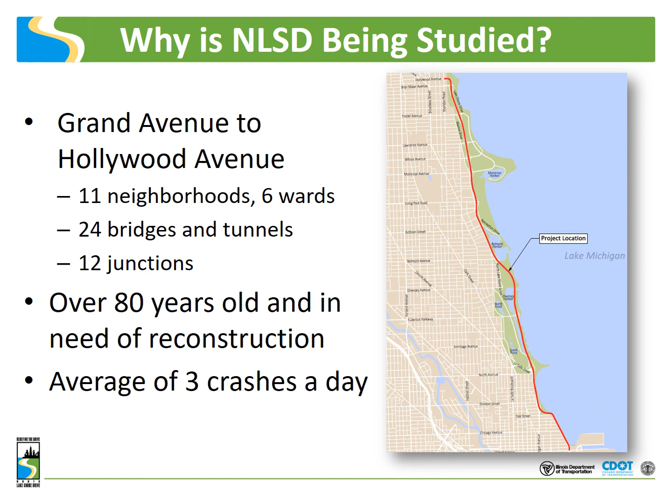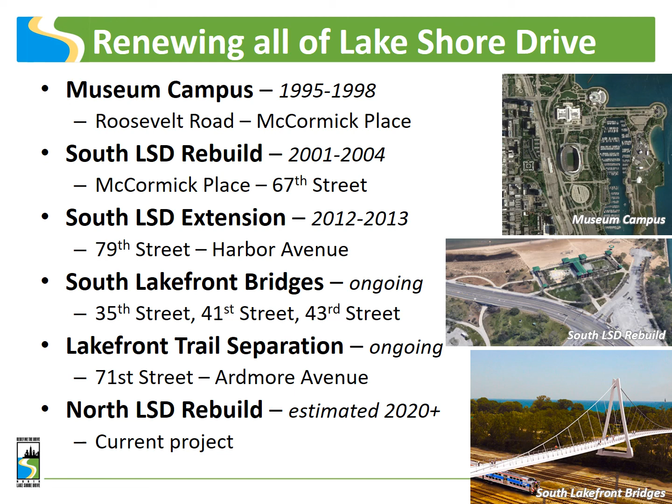This study is part of a larger initiative to upgrade infrastructure and improve safety throughout all of Lake Shore Drive. Multiple projects have been completed on Lake Shore Drive over the past 20 years, including the museum campus, the South LSD rebuild and extension, South Lakefront bridges, and the current Lakefront Trail separation initiative.

The Project Study Group, or PSG, consists of a multidisciplinary team of representatives from the Illinois Department of Transportation, the Chicago Department of Transportation, the Federal Highway Administration, the Chicago Park District, and the Chicago Transit Authority. This group provides technical oversight and expertise in key areas including study processes, agency procedures and standards, and technical approaches.

Some of you may have joined us for the prior 2 public meetings, yet many more of you may be joining us for the first time. We want to highlight the required steps for federally funded projects like this and where we are in this process.

The 3 steps for federally funded projects include Phase 1, where we are currently preparing an Environmental Impact Statement, or EIS, which is the most detailed and rigorous study process. After Phase 1 is complete, Phase 2 engineering would begin. This is detailed engineering, including preparation of design plans or blueprints. Phase 3 is construction. At this time, only Phase 1 is funded.

Over the past few years, we have spent a lot of time capturing your ideas for the corridor, collecting data about existing conditions, considering transportation needs, and developing a range of alternatives. To date, we have received and reviewed over 2,000 public comments.

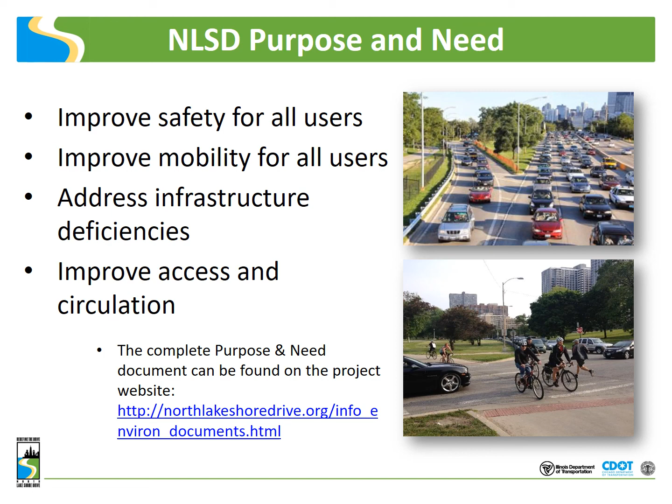After approval of the Purpose and Need Statement in December 2014, the next step was to look at all possible ideas to address the needs of the transportation corridor, keeping environmental considerations in mind. We collected thousands of ideas from the public and even had a few of our own.

Today you will see what we call a range of alternatives, which includes everything from large-scale corridor-wide improvements to a no-action alternative, which only includes performing regular maintenance to the roadway. We have begun the process of whittling down the alternatives, but we are still far from determining a preferred alternative. At each milestone, we reduce the number of options and study those that remain in greater detail.

At one of the meeting stations today, you can see the range of initial alternatives. For these alternatives, a Level 1 screening was performed. We recommend some of the alternatives should be removed based on this screening, since at least one of the following applied: it did not meet the project's purpose and stated objectives, it contained major flaws, it was not financially feasible or reasonable based on significantly greater cost compared to other viable alternatives, or it resulted in severe and unacceptable socioeconomic or environmental impacts.

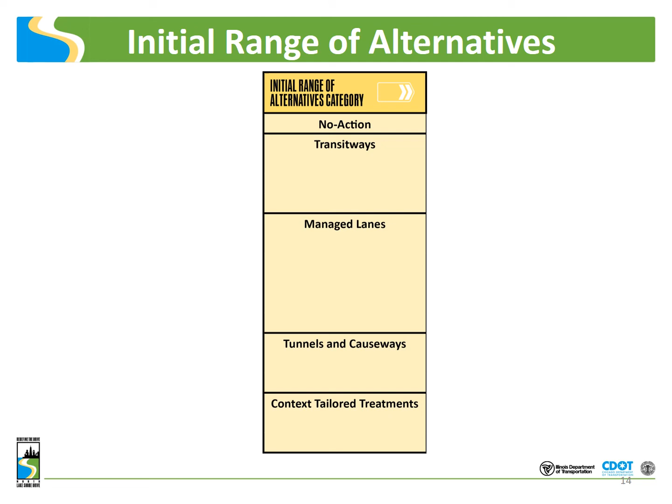The first alternative to be considered is the 2040 no action. No action assumes that routine maintenance is performed on North Lake Shore Drive, but there are no additional trail, transit, or roadway improvements along the drive by the year 2040. When we apply the Level 1 screening criteria to the no action, our analyses indicate that it does not satisfy purpose and need. However, it does provide a baseline condition to which all other alternatives will be compared.

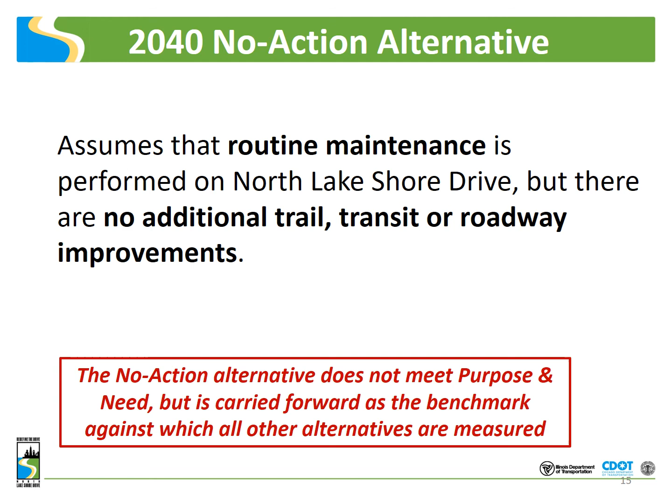One of the categories of alternatives we are considering is termed transitways. These are facilities that specifically address transit movements in the corridor. There are 4 options within this category: bus on left with a dedicated transitway; bus on right with shoulder or weaving zones; transitway off alignment; and light rail transit.

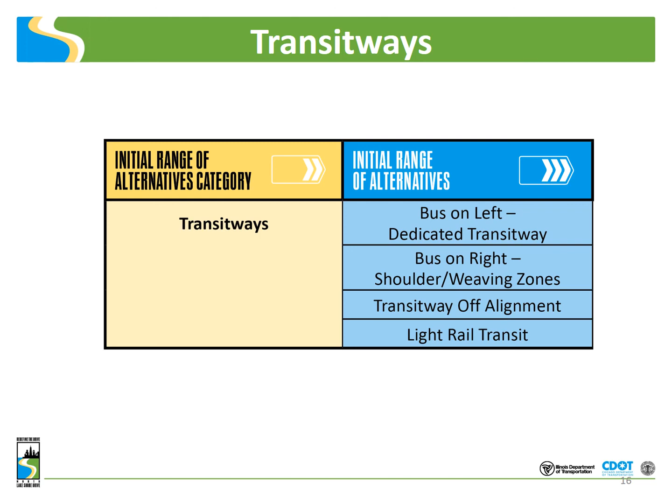It should be noted that all of these options, as considered in the Level 1 screening, include the retention of 4 general traffic lanes in each direction on the outer drive, and would then add a lane or dedicated spaces for transit movements. Based on Level 1 screening, the following 3 alternatives are recommended for further evaluation: bus on right, bus on left, and off-alignment transitway.

All options also provide the opportunity for bus-only queue jump lanes to bypass congestion at entrance or exit ramps. It is important to understand that the project team is considering all of these alternatives, and the results of the Level 2 screening will be presented at the next public meeting.

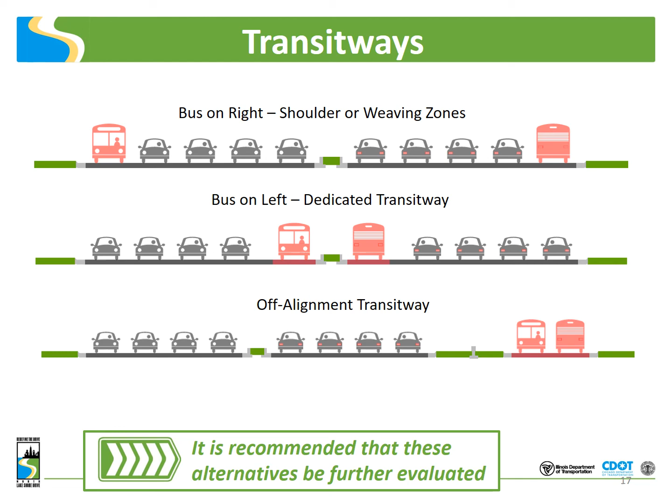As part of Level 1 screening, light rail transit was also evaluated and is recommended to be dismissed as a standalone alternative because it did not meet the project purpose and need. In order for light rail transit to be viable, it would need to serve destinations beyond our project corridor. An 11-mile system extending between McCormick Place and Loyola University has been suggested as an initial system, which extends well beyond the North Lake Shore Drive study limits.

There is a requirement for specialized vehicles, maintenance shop, and storage yard, and there is significantly greater capital cost compared to other alternatives with similar benefits, with total capital costs in excess of $4 billion for the light rail transit system alone. The project team will continue to design transitway alternatives to be forward compatible with light rail transit where feasible, with options such as bus on left or off-alignment transitway.

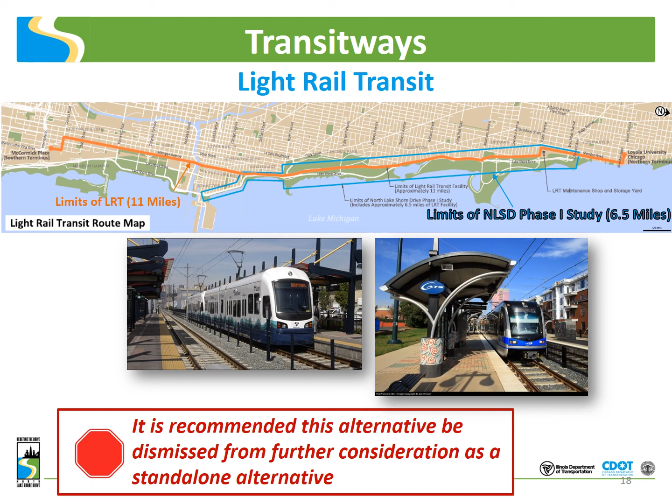The next category in the initial range of alternatives is managed lanes. There are 6 types of managed lanes we are evaluating: high occupancy vehicle lanes, high occupancy toll lanes, express toll lanes, bus-only lanes, express reversible lanes, and toll lanes. The managed lane alternatives are different from transitway alternatives in that it is assumed that the managed lane or lanes would convert one or more of the existing traffic lanes.

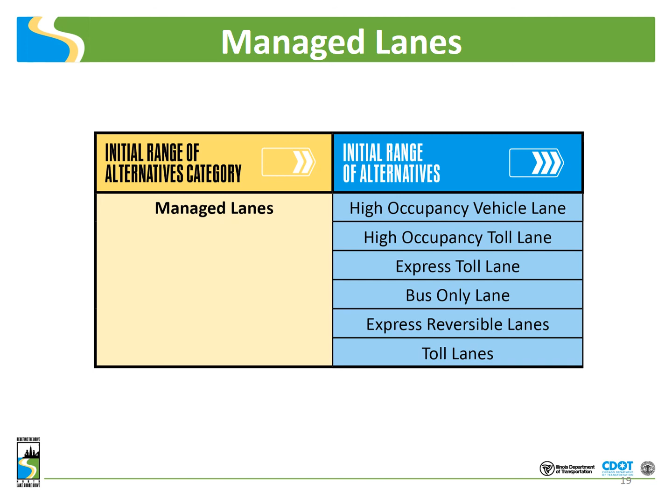Managed lanes are a congestion management strategy designed to improve the performance of a constrained system and potentially provide travel time reliability for CTA buses and managed lane users. Managed lanes provide mobility and operational efficiency to adapt to changing travel demands. Under all managed lanes alternatives, CTA buses may shift out of general purpose lanes to use the facility wherever it aligns with bus routes. Further, the managed lane alternatives can be implemented in combination with context-tailored treatments and transitway options.

You can learn more about these options in the exhibit hall. All are being recommended for further evaluation at this time. Future public meetings will provide additional Level 2 screening results for managed lanes.

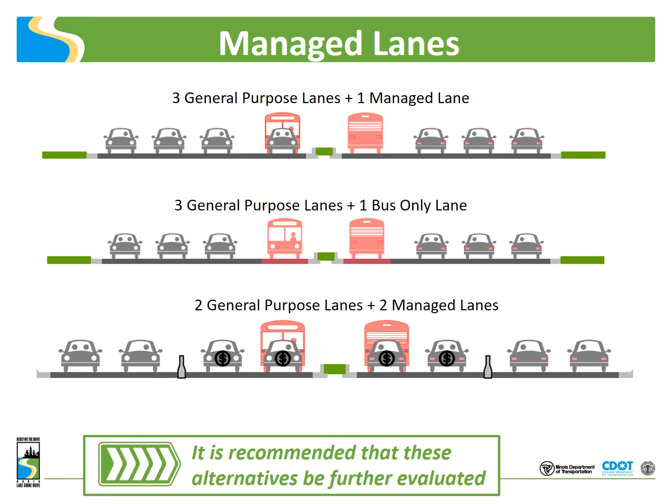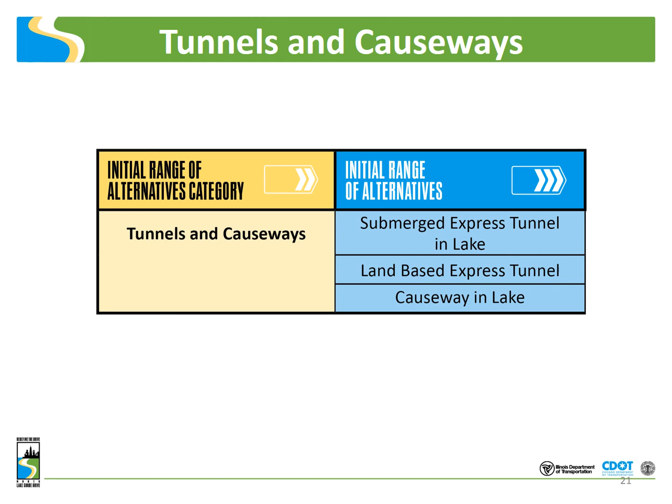The next category of initial improvement alternatives that we looked at are tunnels and causeways. 3 options were considered: a submerged express tunnel in Lake Michigan, a land-based express tunnel below a surface boulevard on the current North Lake Shore Drive alignment, and a causeway in Lake Michigan from Chicago Avenue to Diversey Parkway.

The first 2 alternatives provide express tunnel options, either submerged in Lake Michigan or land-based, which primarily serve longer end-to-end travel through the corridor. The cost of both options would be much greater than other alternatives, in excess of $3 billion, and would require operating expenses several times greater than other alternatives due to the need for items such as an extensive ventilation system to purge auto exhaust and smoke from traffic emergencies.

As illustrated with the red triangles on the graphic, access to North Lake Shore Drive would need to be reconfigured, resulting in traffic concentrated at fewer access points. This would result in traffic impacts to local streets. Based on this, the tunnel options are recommended to be dismissed from further consideration, as the tunnels do not meet purpose and need, and even with user fees, public costs would far exceed costs of other viable alternatives. It should be noted, however, that short tunnel segments may be considered as a context-tailored treatment to minimize roadway impacts.

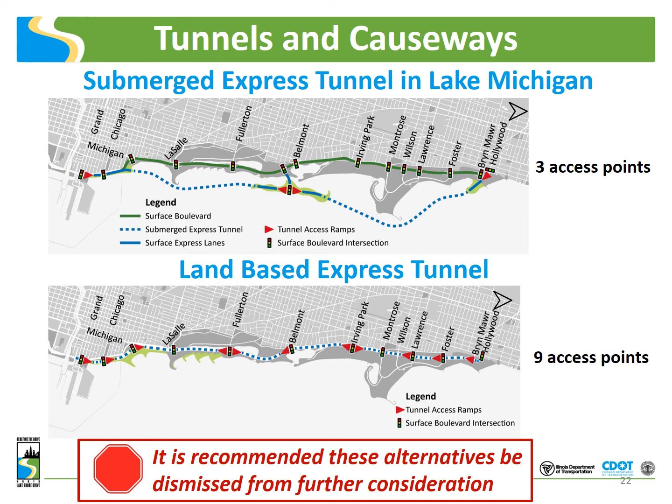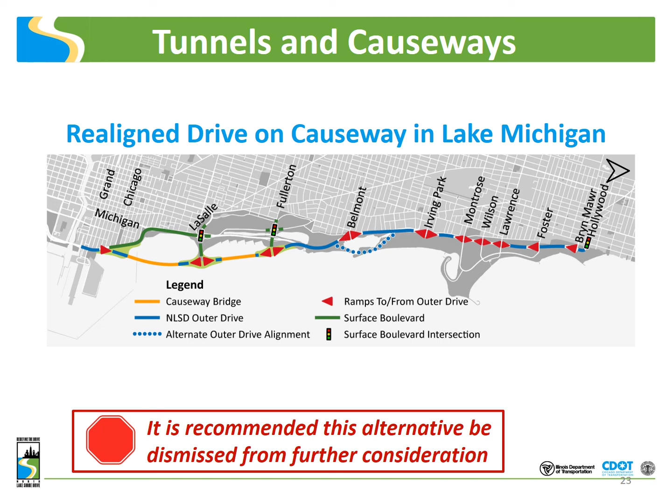In addition, even with user fees, public costs would far exceed costs of other viable alternatives. Based on this, the causeway option is recommended to be dismissed from further consideration, as causeways do not meet the purpose and need. The final category of alternatives are context-tailored treatments.

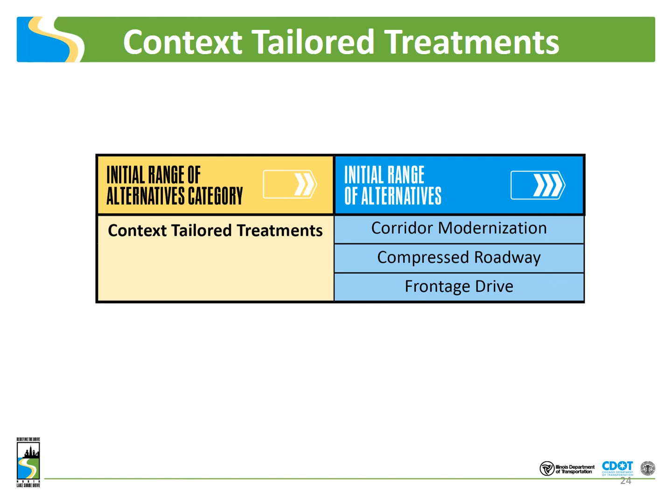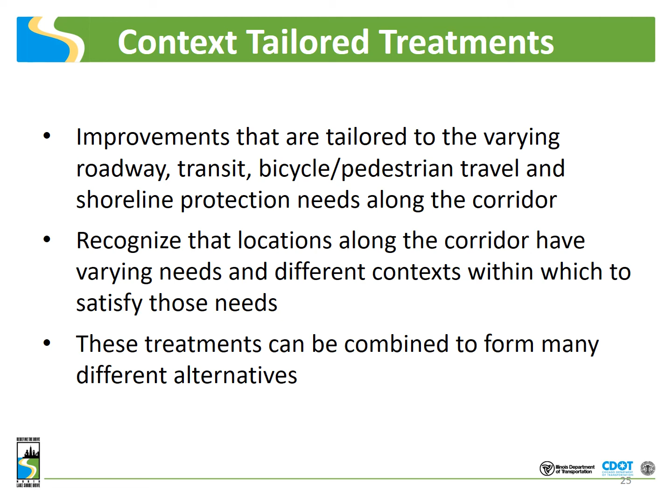The context-tailored treatments are applied as appropriate throughout the corridor to improve safety, mobility, and access for all users. These treatments can be combined in a number of ways to create several alternatives that will respond to needs outlined in the purpose and need. The context-tailored treatments improvements are specifically tailored to the varying roadway, transit, bicycle pedestrian travel, and shoreline protection needs along the corridor. These alternatives have been developed with the recognition that locations along the corridor not only have varying needs, but different surroundings or contexts within which to satisfy those needs.

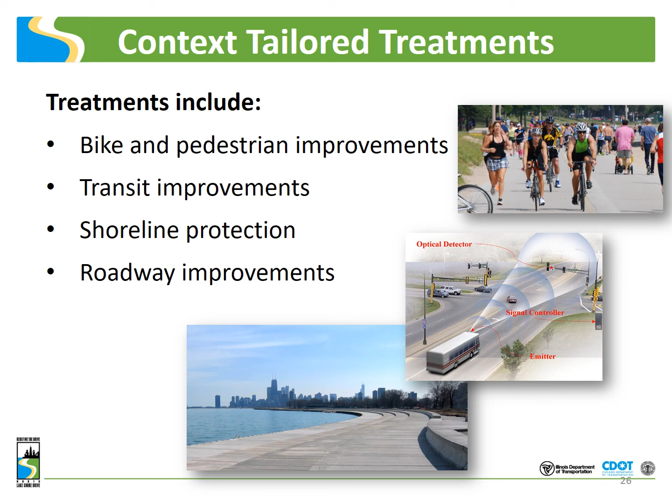Context-tailored treatments include 4 types of treatments: bike and pedestrian improvements, transit improvements, shoreline protection, and roadway improvements. There are 3 concepts for the context-tailored treatments alternative category: the corridor modernization concept, the compressed roadway concept, and the frontage drive concept. Each of these have their own unique characteristics, yet many of the elements are not mutually exclusive and can be applied to other concepts as well.

We are recommending that this category of alternatives be further evaluated. The context-tailored treatments concepts have passed the Level 1 screening and have moved into the Level 2 screening. Similar to what we will show you for transitways and managed lanes at the next public meeting, we have provided Level 2 exhibits for you to review at this meeting today.

In the main exhibit room, you will see 3 concepts for each context-tailored treatments corridor section. We ask that you review and comment on the exhibits for each context-tailored treatments concept.

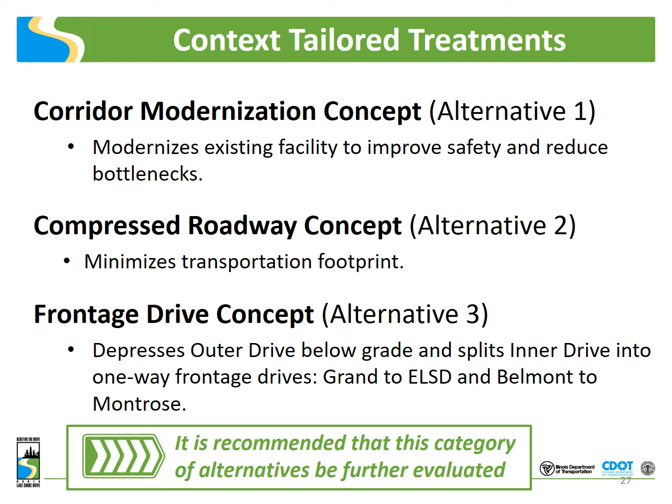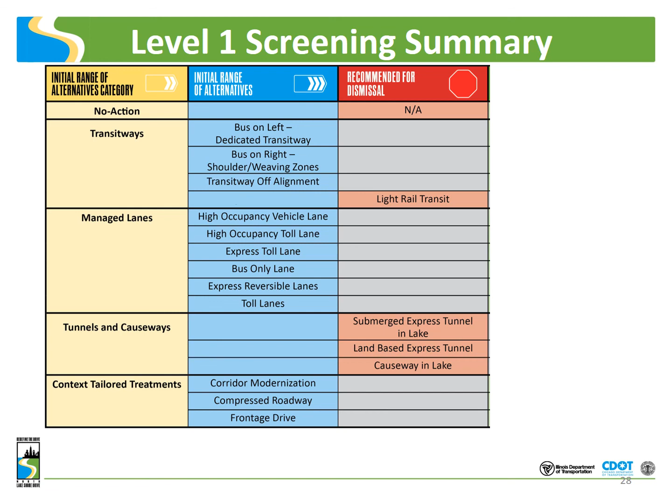This table summarizes the initial range of alternatives that have been considered, and based on Level 1 screening, which alternatives are recommended for dismissal and which will be further considered. At this time, it is recommended that light rail transit and all the tunnels and causeways be eliminated from further study. All other alternatives will be further evaluated.

You can review all of these alternatives at the initial alternative station in the room next door. Staff will be available to answer your questions on this topic.

The North Lake Shore Drive project is an exciting and complex study, and we welcome your input. It is the marriage of lake, beach, park, bikes, pedestrians, roadway, and transit. Your input and participation on this unique and exciting project will lead to a once-in-a-lifetime vision for the future of North Lake Shore Drive.